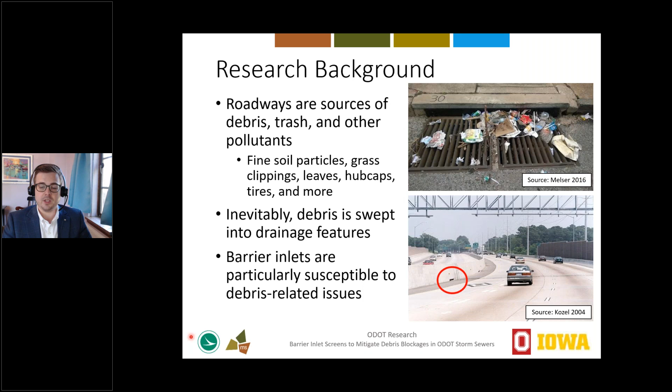A little bit of background about this project: as we all know from driving around on roadways ourselves, roadways can be a source of trash, debris, and other pollutants. Everything from fine soil particles, grass clippings, leaves, and hubcaps inevitably ends up on the roadways. And when it rains, this gets washed into the drainage features and the roadway inlets.

This research project focused primarily on barrier inlets due to their susceptibility to this debris issue. The barrier inlet you're probably very aware of, whether you've noticed it or not, are the concrete barriers along highways that divide traffic. In the ODOT world, these barrier inlets are comprised of a very short but long inlet window, as you see in these pictures: 4 inches tall by 10 feet wide.

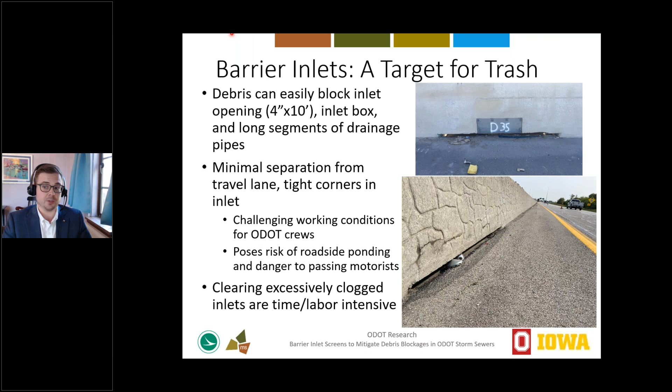Due to this particular geometry, large debris like plywood, buckets, anything that could fall off a car or be found on a roadway, can get swept into these inlets. Once it gets into that very small opening, it's very difficult to get out. So ODOT maintenance crews have to perform very invasive sewer cleaning and other maintenance practices to clean out the inlets after debris has gotten into the underground storm sewer system. This poses a risk to the roadside maintenance crews who are exposed to traffic for extended durations of time.

This picture shows a good example of the kind of issue we're dealing with along the roadways. As you can see, taken down in District 8 near Cincinnati, a small piece of plywood about 30 inches long, 12 inches tall - that's the type of debris geometry that can be swept into this inlet.

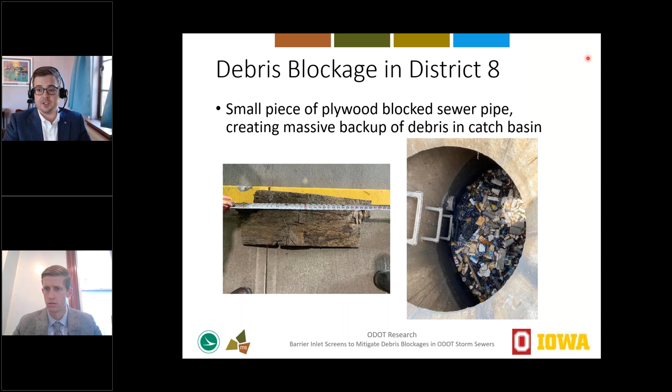Once that piece of plywood got into the underground storm sewer, it oriented itself just so that it was able to block the outflowing pipe underground, leading to a large debris backup that backed up the whole system. As you can see in that picture on the right, quite a bit of debris was unable to leave the sewer system, and this had to be vacuumed out, creating a big maintenance issue for ODOT maintenance crews. If left unattended, this can cause the inlets to clog and have reduced hydraulic efficiency.

So the goals and objectives of this project are to prevent large roadway debris from entering these systems. The large debris is what causes these underground sewer clogging issues and is the most difficult to remove once it enters the inlet. So we really focus on the large debris.

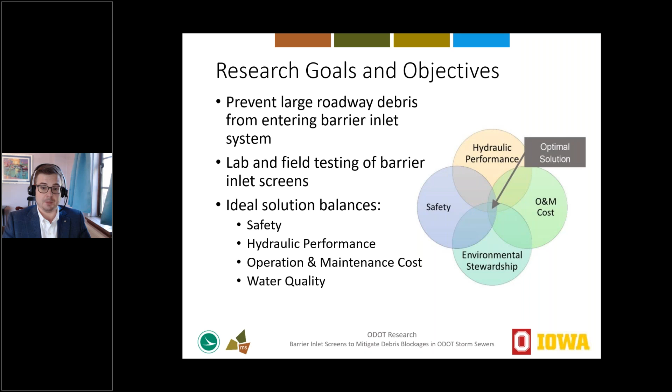We conducted this through a combination of laboratory and field testing of various inlet screen devices, and then identified our optimal solution as one that could balance safety, hydraulic performance, operation and maintenance costs, and obviously provide water quality benefits to the downstream receiving waters.

This research kicked off in September 2021 with an extensive literature review and a review of all available products currently on the market to address this particular problem. We then developed our testing methodology, installed field monitoring sites, constructed a physical hydraulic model setup at the University of Iowa, and did all of our testing for about 2 years. That brings us here today, giving this final presentation, and we'll be wrapping up our final report in June.

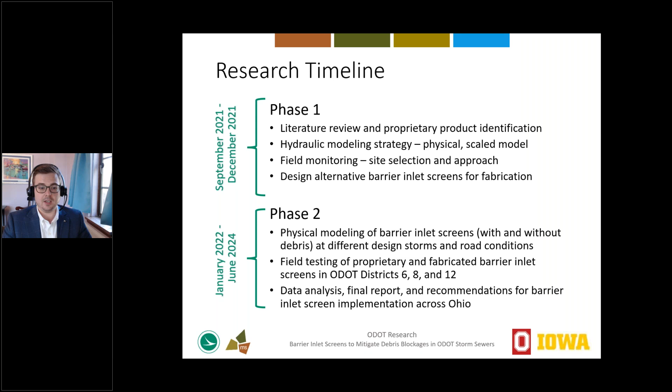We started with a very extensive research of all the available products on the market to identify what current solutions are out there that we could test. We identified a large number of proprietary manufactured products, and then using a selection matrix that evaluated different factors and product features, we were able to identify 4 products that contained a good cross-section of the market.

We wanted to test different attachment mechanisms, different opening geometries, and different special features. Some of these screens are automatically retractable, with springs that allow them to adjust, so the bars can open up when there's heavy hydraulic loading. We just wanted to test a variety of characteristics to see which performed best and would provide the best benefit to ODOT for their particular needs.

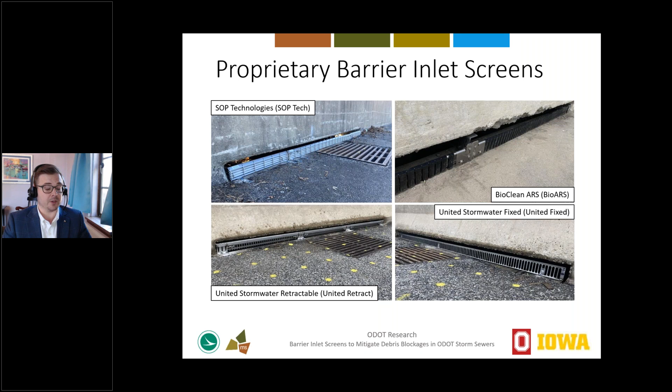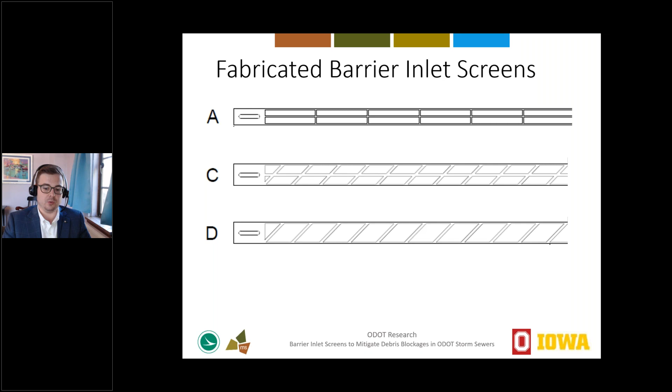In addition to the proprietary screens, we also fabricated some of our own unique designs. Because ODOT wants to focus on the large debris that's really causing them their issues, we created inlet screens with bigger openings than what's typically available in a commercial product. And because of the application along existing roadways, there's quite a bit of geometry deviation in these inlet windows across the roadways, so we wanted a product that could be easily bolted to the face of an inlet and be more forgiving in terms of geometry, better suited to a statewide mass-scale implementation.

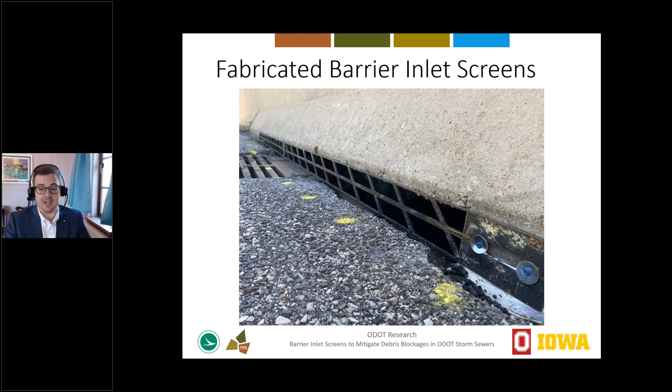So between the manufactured screens and our own fabricated screens, we identified a whole different variety of opening sizes and characteristics to test in terms of debris capture efficiency as well as hydraulic efficiency.

This is the standard ODOT Type D number 3 single slope barrier inlet, the most common one you'll see along ODOT roadways. This is the one we focused our design on, and it includes the inlet window, which is 10 feet wide and 4 inches tall. In front there, you see that catch basin, which is a Neenah slotted grate, 30 inches by 36 inch geometry. Worth noting that the grate is there in front of the inlet in some installations, but the inlet window can also stand on its own without that slotted catch basin grate. So we tested both of those potential scenarios in our testing.

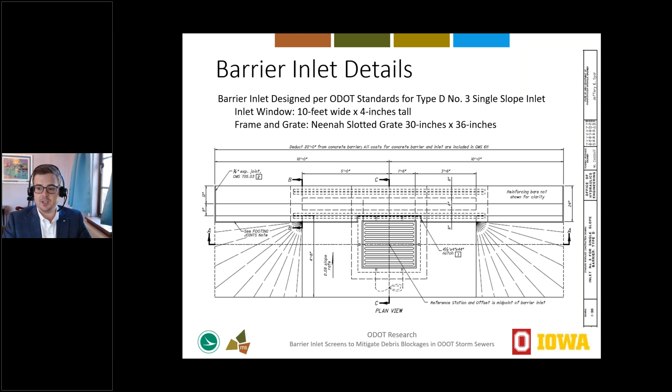So now I'll turn it over to Troy Lyons to talk about the laboratory experimental design.

Thanks, Justin. So I'm going to go through the laboratory experimental design and the testing that we did in the lab to evaluate the barrier inlet performance and screens.

We discussed doing a reduced model scale to be more cost efficient, but there were a couple of advantages to doing it at full scale. One is that we could purchase the existing screens directly from the proprietary groups, so we didn't have to try to replicate something at a reduced size. We also didn't then need to scale the debris; we could use actual debris for the debris tests.

So flow is conditioned as it enters the head box. There's a 10-foot wide by 16-foot long head box at the upstream end, and we pump water into that box.

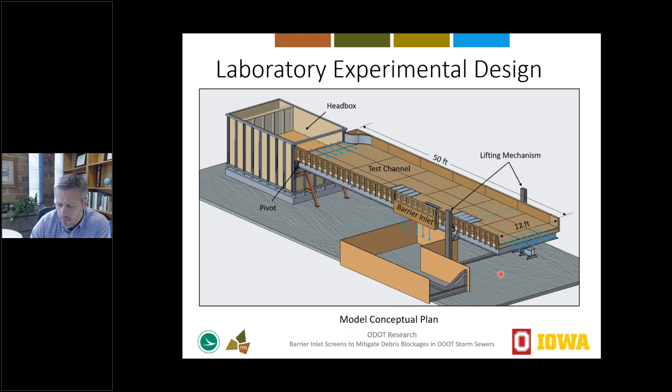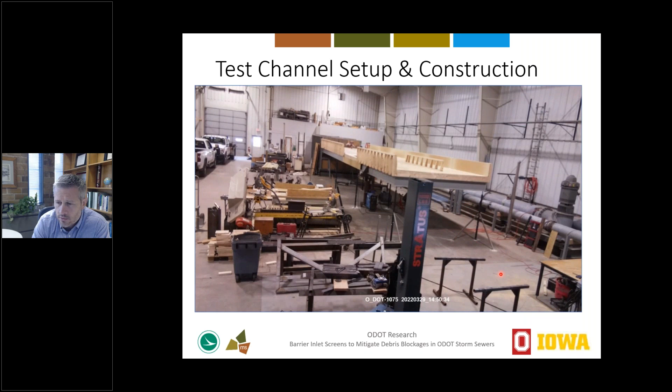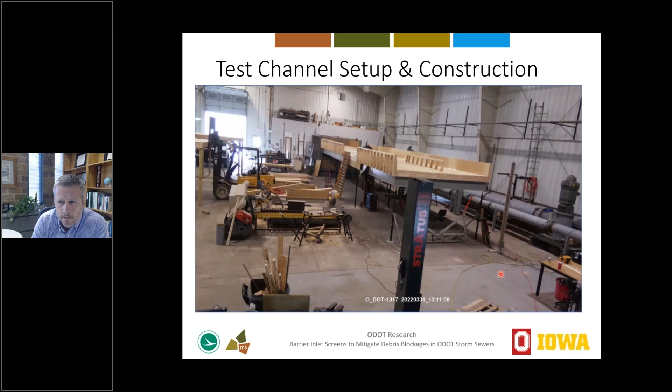So this slide shows a time lapse of the fabrication of the test channel and how it was set up. We started with three 50-foot long steel beams to support and create a rigid 50-foot long bed. That was then elevated, set into place. You can see that happened just there. We modified an electric car hoist that was placed near the downstream end so that we could raise and lower it. And then we had intermediate supports that we placed along the channel for our fixed positions that were required for the testing. You can see in the background the piping from the pumps.

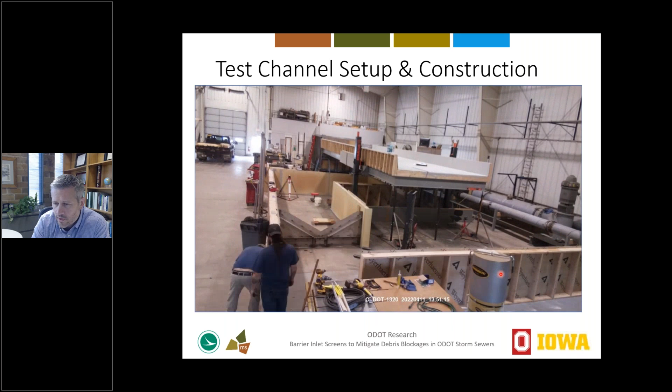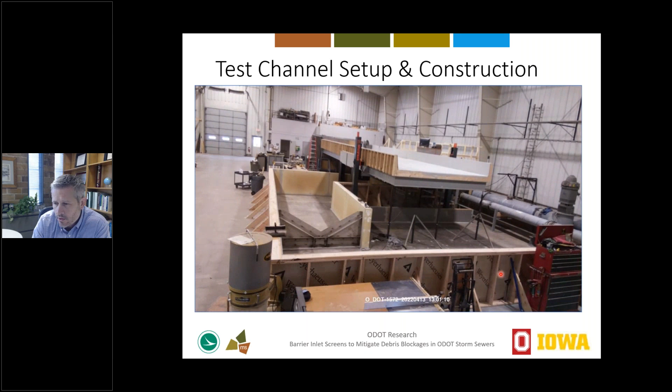So we have an underground reservoir that holds water, so we can pump water out of that into the head box through the channel. And then it comes out of the barrier inlet into that side channel that you can see is being fabricated there, and flows through a V-notch weir that's installed at the end of that channel so we can meter the flow coming out. And then the rest of the flow, including what's going off the end of the test deck, combines, gets filtered through some screens to filter out any debris. The water goes back into our sump, and that clear water then is recirculated back into the test channel.

So we did a friction slope calibration of the test bed. In our lab, we created the surface of the road deck out of plywood, but we knew that wouldn't provide us the correct friction slope. So we did an evaluation using Manning's N to check it and see what it started out to be. And then we incrementally roughened it to achieve a target Manning's N to match that of concrete or asphalt.

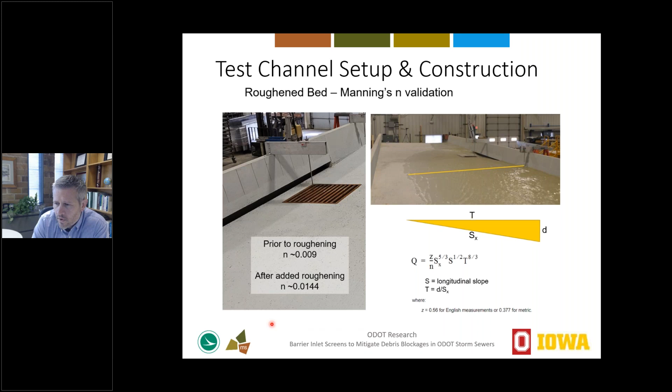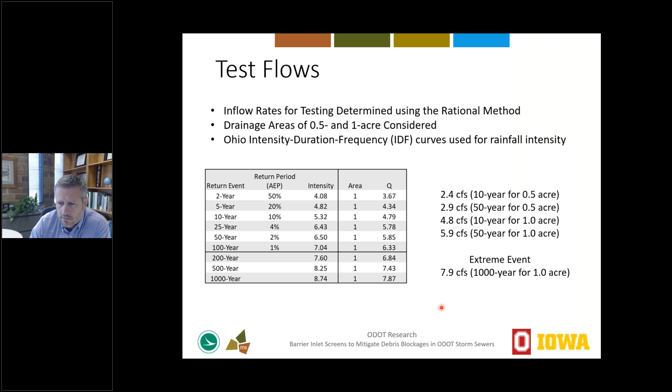These initial tests were done to characterize the hydraulic performance of the barrier inlet with and without the grate. So we metered the intercepted flow and then used that to calculate the hydraulic inlet efficiency over a range of different longitudinal and cross slope combinations. And what that did was provided us baseline hydraulic characteristics to later compare for when we added the screens onto the inlets.

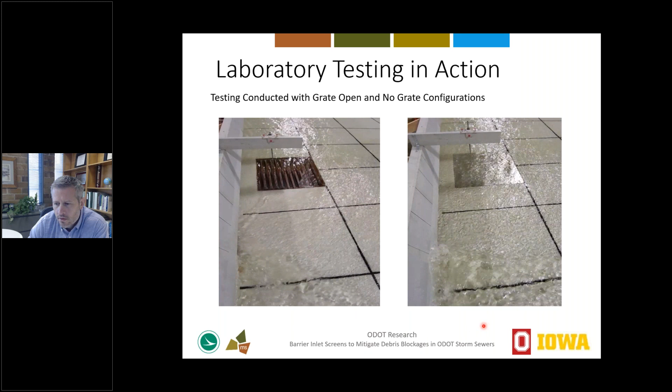To determine what debris we were going to use in the lab, we had to do some type of characterization. There were two sources that were quite helpful. One is that while we were designing and fabricating the test channel and doing the initial hydraulic analysis, Ohio University was already out in the field analyzing sites and collecting debris, so they were able to characterize what they were finding at the sites selected for field observations.

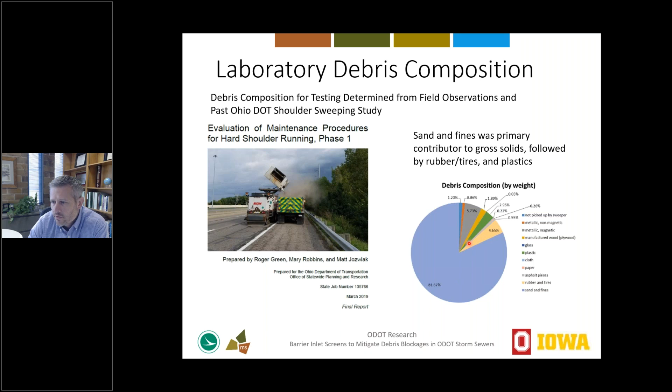That helped inform what we used in the lab, as well as a study from 2019 done for ODOT to characterize the debris collected by street sweepers. That's what this graph shows here on the right, a pie chart of the debris composition by weight. The large blue area, over 80% by weight, is sand and fines. After that, rubber, tires, plastics, and to a lesser extent, glass and metal.

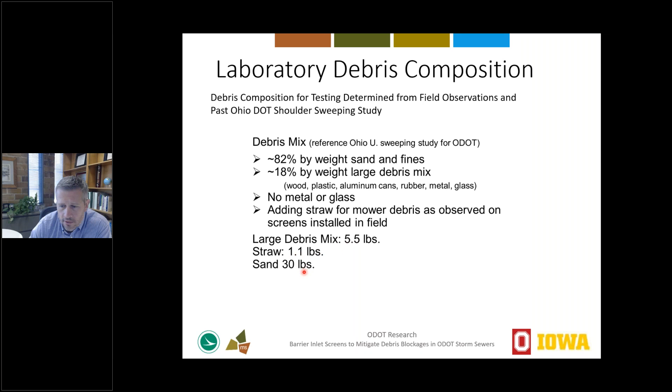So what we ended up using was a mixture informed by both what we were seeing in the field and the study we had access to. We used 82% by weight of sand and fines, and most of the rest was a large debris mixture of wood, plastic, and aluminum cans. We did not use metal or glass, but we did add straw to simulate mowing debris, as that was identified as a significant risk for clogging. We ended up with a large debris mix of about 5.5 pounds by weight, 1.1 pounds of straw, and about 30 pounds of sand used for each test.

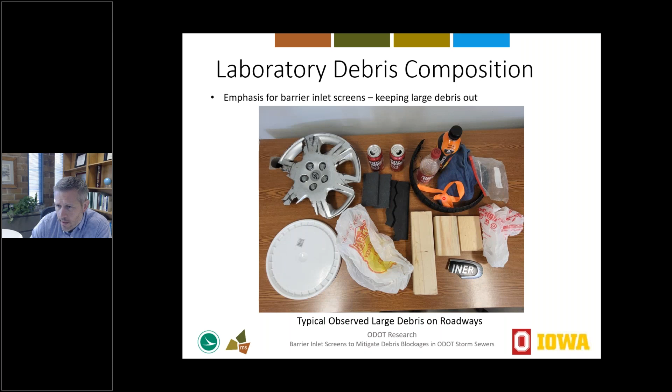Here's a photo showing an example of the large debris used. Some of this was debris collected from roadways, and other pieces were representative of typical things that could be found: a hubcap, aluminum cans, plastic bottles, pieces of rubber tire, plastic grocery bags, a bucket lid, chunks of construction lumber, a strap, and some pieces of cloth.

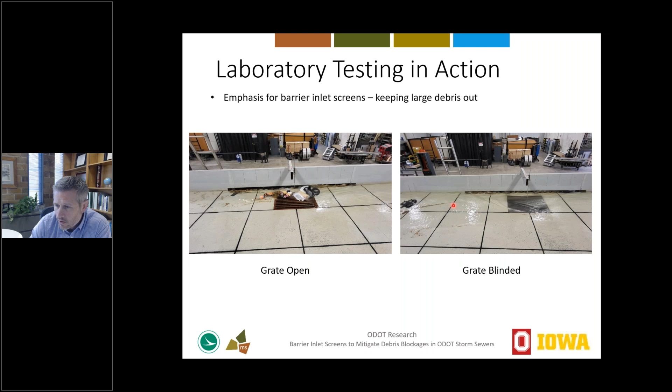We also see different characteristics in what happens to the debris. With the grate open, because most of the flow is leaving the test channel and not going beyond, it leaves a lot of the debris behind, much of it on the grate, where most of the flow is going. When the grate's blinded, we see a lot of the debris actually passing along with the flow instead of staying on the grate.

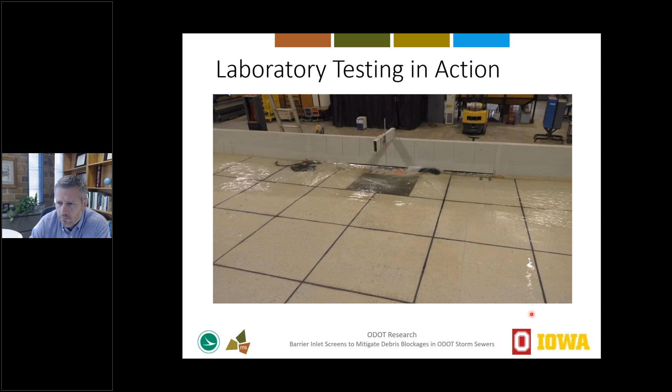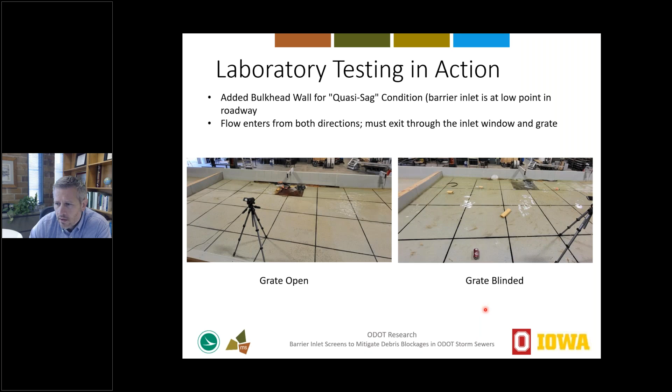So the grate was shown to be quite beneficial in a sag condition, both in keeping the water levels down and in being less prone to clogging.

In terms of how we quantified the lab results, this table is an example of one of many in the report. The rows are ordered by flow rate, from 2.4 CFS up to 7.9, and the columns are ordered by decreasing hydraulic efficiency. The baseline is the most hydraulically efficient, followed by the 3 fabricated screens—type A, D, and C—and then the 4 proprietary screens. This specific table shows values for a half percent longitudinal slope, 4% cross slope, in the sag condition with the grate open.

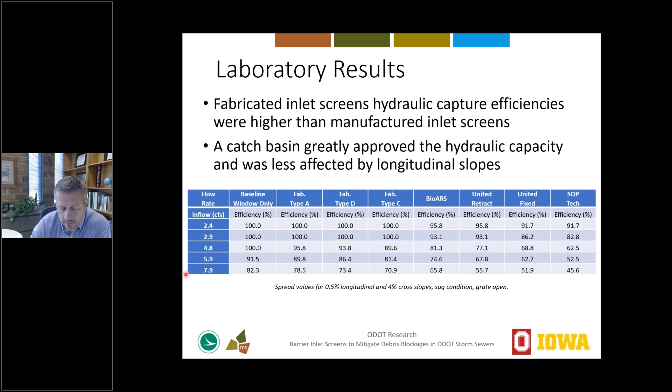The takeaways here were that, in general, the fabricated screens A, D, and C are more hydraulically efficient than the proprietary screens. Also, the catch basin, whether blinded or open, has a significant impact on the hydraulic capacity.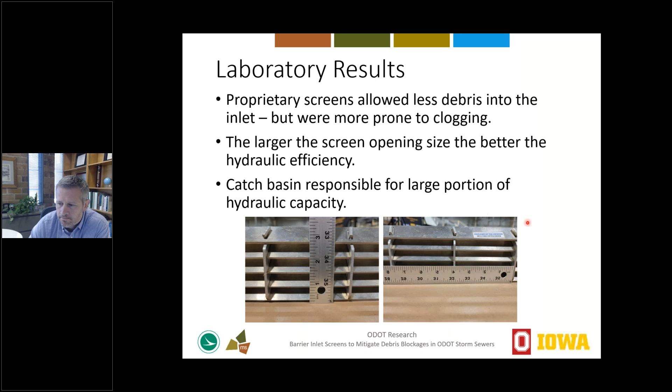Conversely, the fabricated screens with larger openings were more hydraulically efficient. They were less prone to clogging because they let more of the smaller to intermediate sized debris through, while keeping the large debris out, which was the goal. Finally, the grated catch basin does significantly impact the ability to handle debris and handle flows.

So Andrew, it's all yours.

Ohio State was tasked with performing field monitoring of these barrier inlet screens on actual roadways across Ohio. At the onset of the study, we consulted with the TAC to identify areas of hotspots for debris accumulation, and to no surprise, these were located in the greater Cincinnati, Columbus, and Cleveland areas.

So this is ODOT's districts 12, 8, and 6, as you can see there on the map. In each of these regions, we identified clusters of barrier inlets—8 barrier inlets in each region. The idea was to minimize variations between climatic factors, traffic, or littering practices, and to congregate each of these screens in an area that was relatively the same in terms of treatment.

In total, we were able to test each screen in triplicate, with one in each district. We also had a control in each district—in other words, an inlet that did not have a barrier inlet screen installed—so we could compare the barrier inlet screens against current practices in the state.

After identifying our sites, the research team faced an interesting challenge: we needed to monitor and be prepared to rapidly respond to drainage issues on the roadside in districts over 200 miles apart. To address this, we turned to real-time monitoring of these inlets using internet-connected depth sensors built in-house at Ohio State. We also paired those sensors with wildlife cameras to provide photo documentation of debris, and performed sampling at these inlets when we met certain conditions, which I'll show on the next slide.

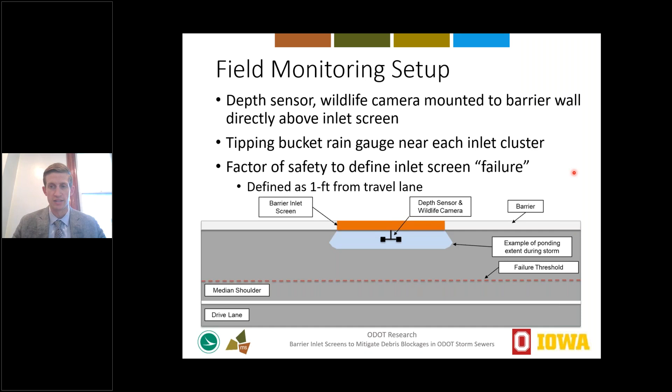We also set up alert protocols to notify research staff when debris needed to be collected, because we were posing safety risks potentially due to the extent of ponding in front of these screens.

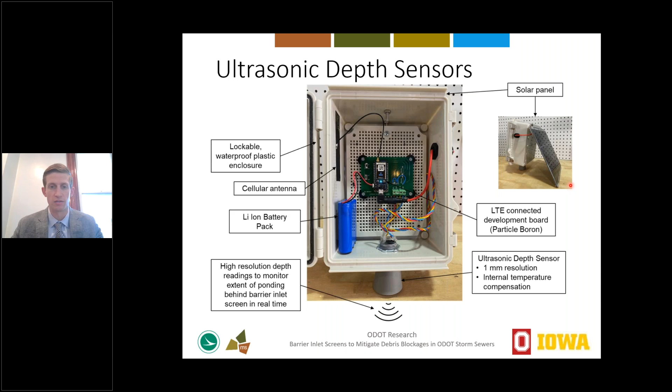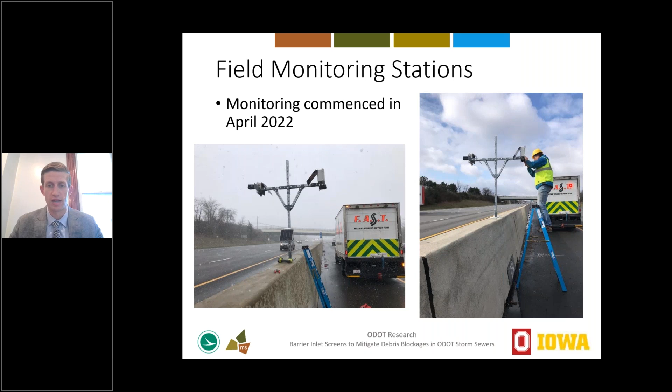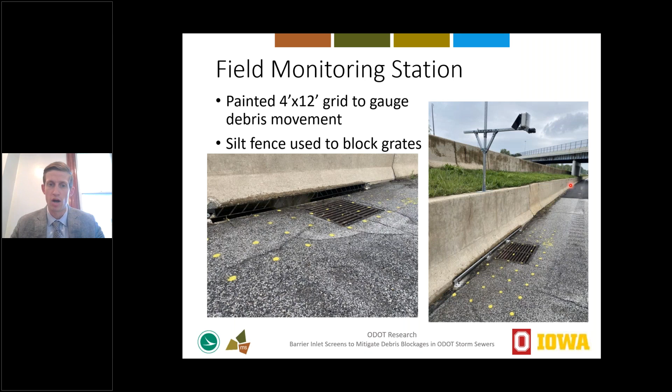Some of our inlets had grates, as shown in this picture, but in fact half of our inlets were barrier inlet window only, so they did not have that catch basin grate. So in order to make an apples to apples comparison across the 24 barrier inlets we were studying, we used sections of silt fence to temporarily block off those grates and encourage all water to flow in through the barrier inlet windows themselves.

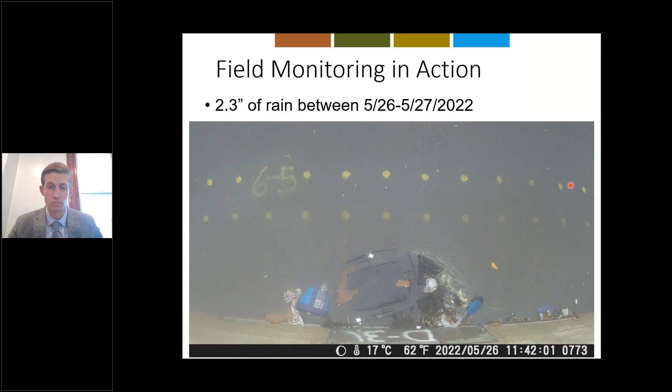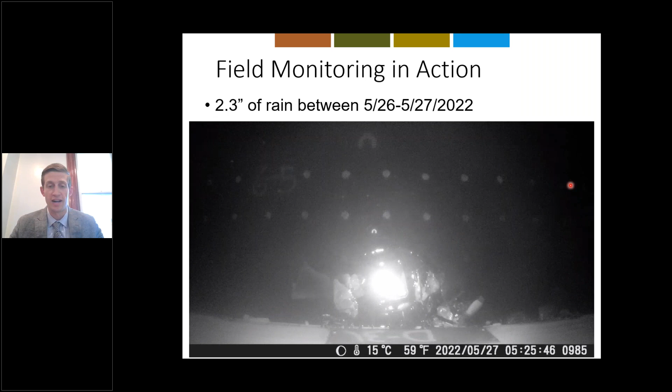Here's a time-lapse video of field monitoring in action. This is a large rain event, 2.3 inches over the course of 2 days, about 6 weeks after we installed the barrier inlet screens. A couple of things to point out: first, you can really see the amount of runoff and water directed to these barrier inlets. That's a result of the drainage areas feeding these being completely impervious and also extremely efficient in their ability to convey flows to these inlet points.

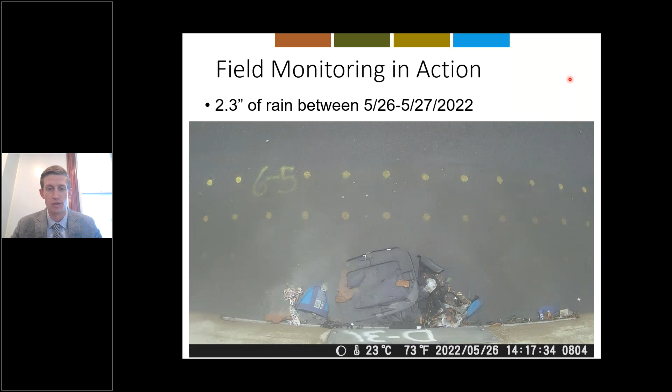The other piece I'll point out here is this plastic tote lid stuck in front of this barrier inlet window. That is almost exactly the type of debris we are trying to prevent from getting into the sewers, and it's very similar to the piece of plywood that Justin showed earlier that created that debris backup in District 8. If that were to get into the sewer and orient itself perpendicular to flow, it could result in a huge maintenance burden to unclog sewer pipes down the road.

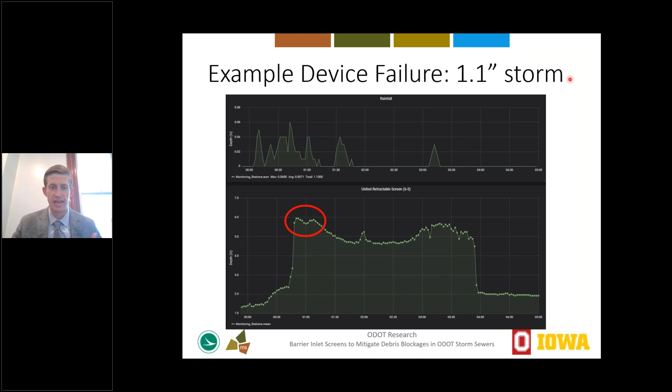Here's an example of rainfall data and a hydrograph from our first failure storm, which was a 1.1 inch storm. Most of this rainfall occurred within an hour shortly after midnight. In the bottom image, you can see how stage in front of our barrier inlet window picks up quite a bit until we exceed that ponding extent failure threshold.

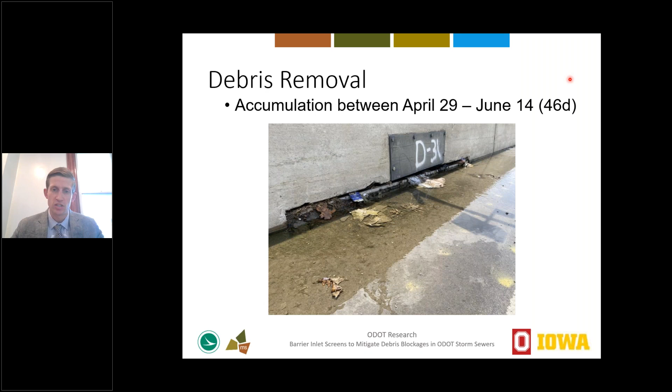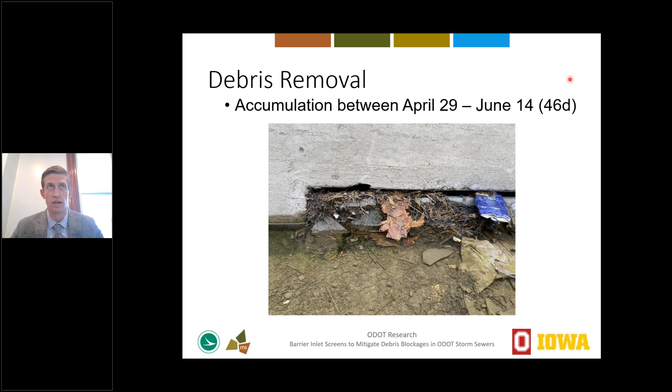The day after this, we went out into the field. This is one of the proprietary screens shown here in a sag condition, in that low point, receiving water from both sides. This was debris that had accumulated over 46 days. In these close-up images, you can see all sorts of material: organics, cardboard, aluminum cans, effectively blocking all of the inlet windows in this particular screen.

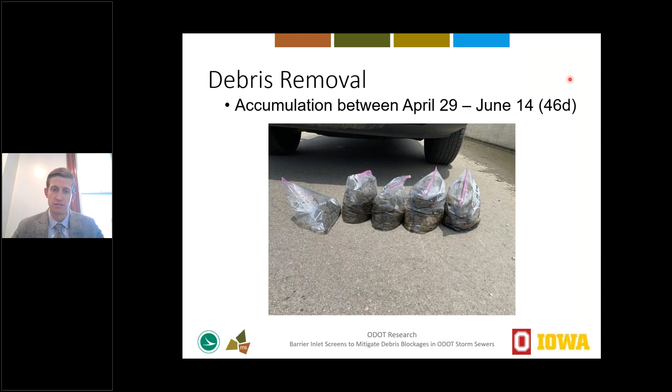The research team went out, collected this debris, reset conditions, and brought back what was effectively 4.5 gallon-sized Ziploc bags to our lab for analysis. In total, we had 13 of these debris failure threshold events over the course of the 2-year study, amounting to 271 pounds of material.

All 13 of these events occurred in Columbus, which is ODOT District 6. We think this happened for a couple of reasons. First, this was the site with the highest AADT, over 130,000 vehicles, so quite a bit of traffic load moving across these sites. Second, these sites were also on some of the flattest topographies, both longitudinally and from a cross slope perspective, very low slopes. We think these two reasons really contributed to why we had these debris collection events only occur in Columbus.

In support of the study that Troy showed previously, the majority of the debris we found was small sediment. We also saw rock and gravel as the second most common, followed by plastics and vegetation. In total, the average failure frequency was just over 91 days. But as mentioned, these 13 events only occurred in Columbus, or ODOT District 6. Considering the other cities we monitored, we did not have any debris collection events, so if implemented across the state, we think this number could be quite a bit longer.

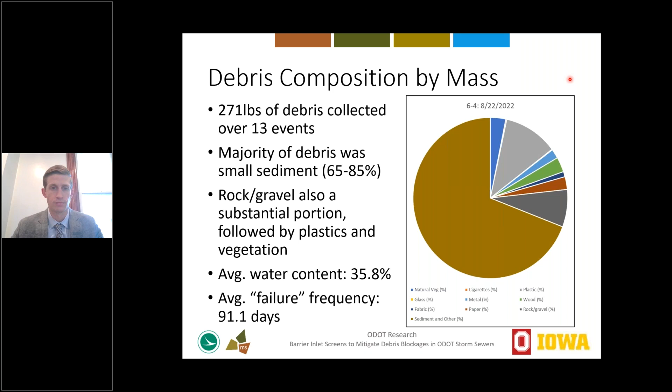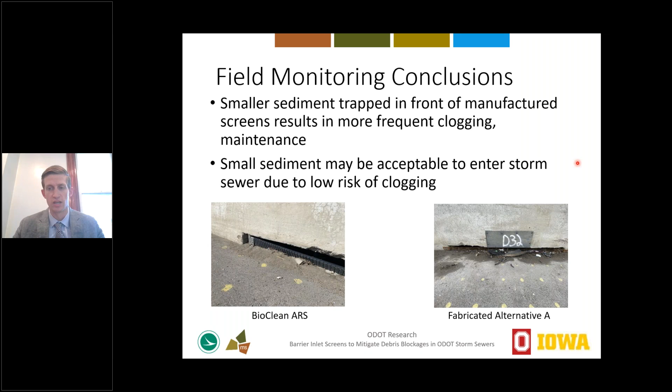Some conclusions from the field monitoring portion of the study: as Troy mentioned, we tended to see smaller sediment trapped in front of the manufactured screens, especially compared to our fabricated screens. You can see that in the image on the left, with a lot of small sediment trapped in front of this particular proprietary screen. On the right, in front of our fabricated screen, you don't see much of that small material, instead seeing larger pieces of cardboard and plastic. This smaller sediment is probably acceptable to enter the storm sewer because we think it poses a low risk of clogging those sewer pipes.

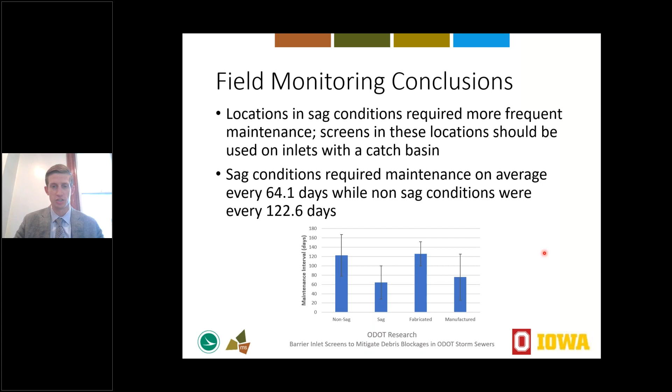In April of 2024, we did some field maintenance testing of the barrier inlet screens to ensure that if implemented across the state, these screens could be maintained effectively to reset hydraulic efficiencies when debris had accumulated to a certain point. In consultation with the TAC as well as maintenance crews across the state, we came up with three maintenance measures that we wanted to test.

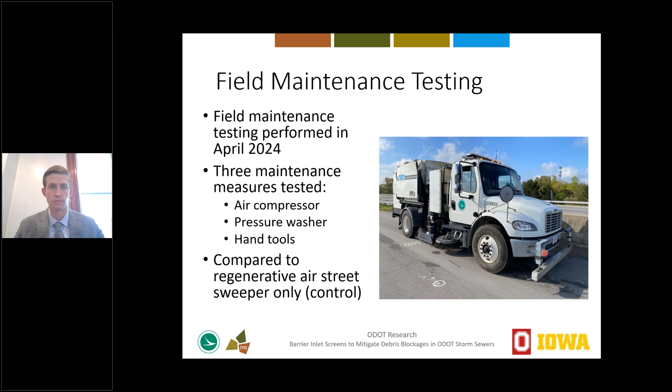This included an air compressor, a pressure washer, and the use of hand tools, all combined with the use of a regenerative air street sweeper, which represented current maintenance protocols across the state. We compared those methods against the regenerative air street sweeper only, which served as an experimental control for the maintenance testing. I want to show some images of these maintenance tests in action.

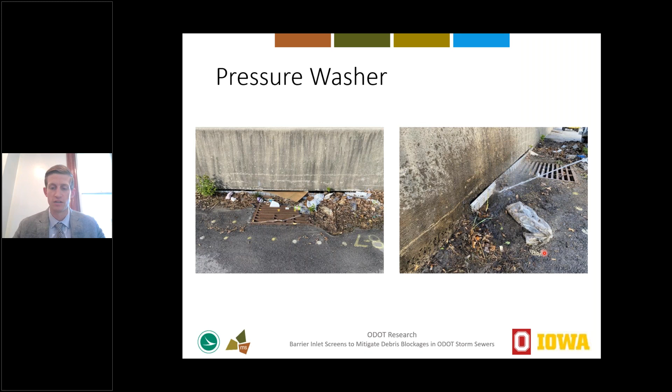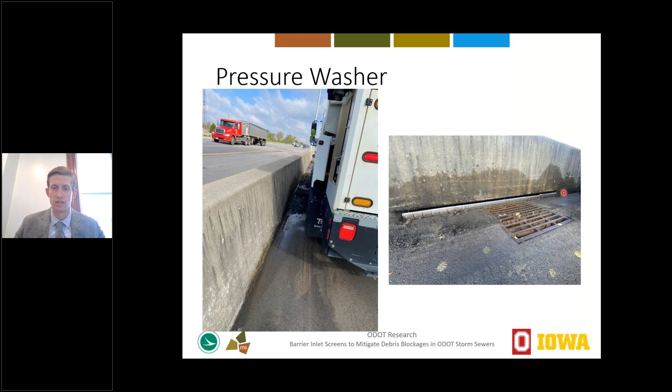Once the pressure washing had been completed, we took the regenerative air street sweeper and passed it over the inlet, and you can see on the image on the right that we've essentially got a completely clear screen, indicating that maintenance was highly effective in restoring the hydraulic capacity and function of this particular screen.

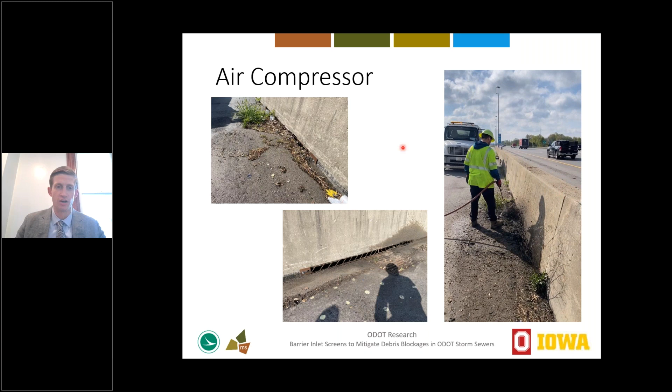Next, as I mentioned, we tested an air compressor. The image on the top left shows our initial conditions - again, quite a bit of material accumulated in front of this fabricated screen. On the video on the right, you can see how that air compressor is doing a great job of loosening up the material that had become trapped on and in front of the inlet screen.

And then finally, we again took the street sweeper, passed it over the screen, and you can see the stark difference between the condition of the screen prior to maintenance and after maintenance had been completed. Again, very, very effective in terms of loosening that material.

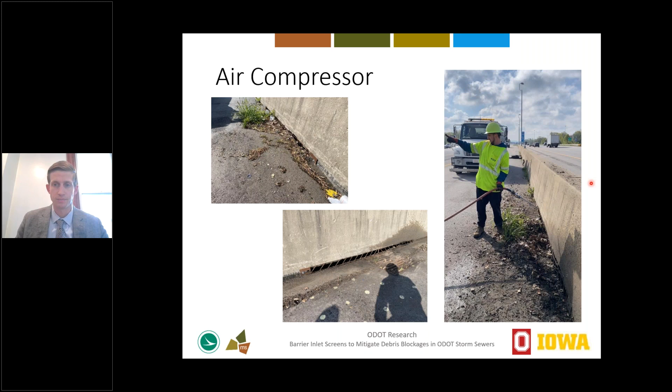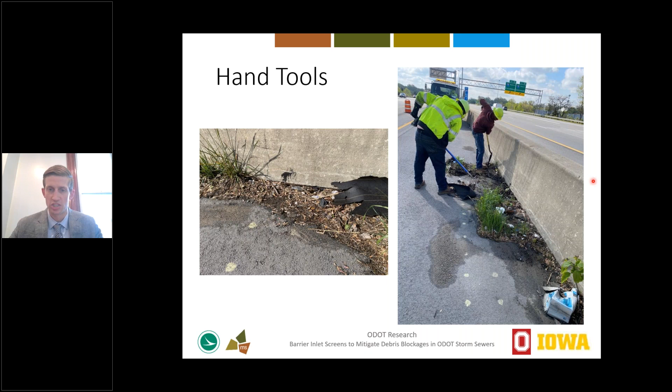The next method that we tested was hand tools. This represented one of our more simple methods in terms of the type and complexity of equipment needed, but it also had some drawbacks in that it required more staff, a more hands-on approach to loosen this material. But again, just like the other methods we tested, this method was also highly effective, and we found loosening that material prior to the street sweeper passing by the barrier inlet screen was a really potent combination to remove the debris from the roadside.

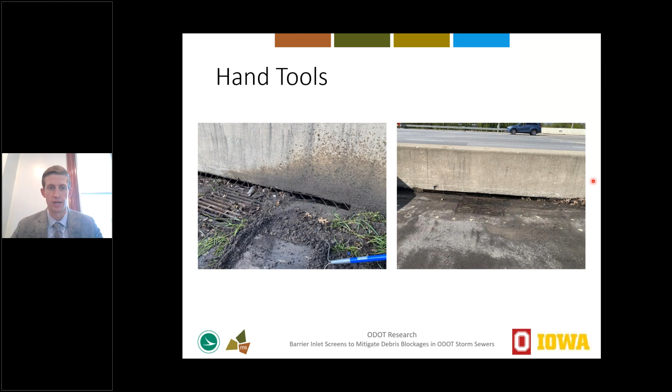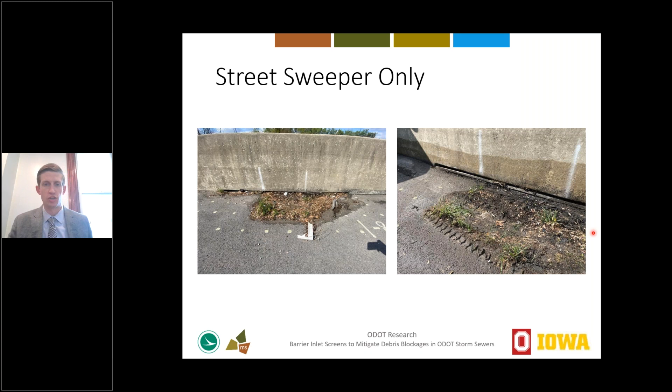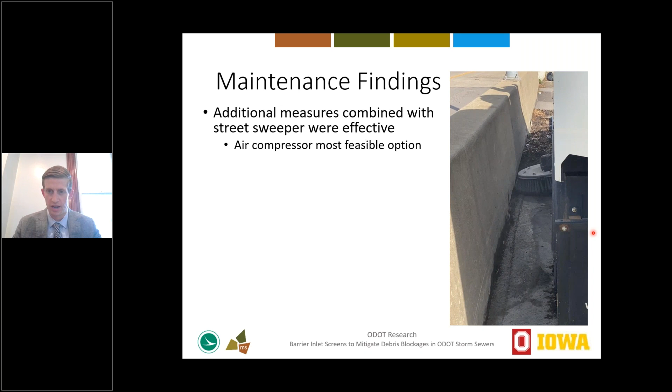So what we concluded is that these additional maintenance measures combined with the street sweeper were highly effective. You can see here on the video on the right, the street sweeper going by after we had used the pressure washer in this case.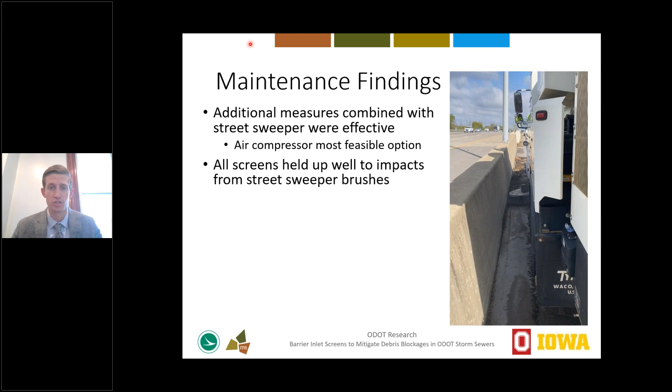After consulting with the research team and members of the TAC, we found that the air compressor is likely the most feasible option for barrier inlet screen maintenance at scale. We were really happy that all of the screens held up well to impacts from the street sweeper, as you can see here with one of our fabricated screens.

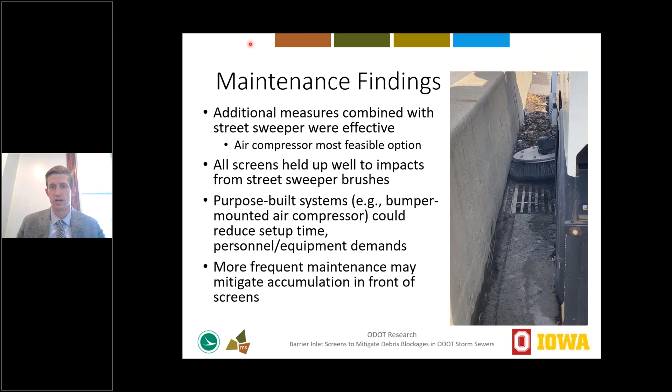We think there might be opportunities for purpose-built systems, something like an air compressor mounted to the bumper of a street sweeper, for example, which could reduce setup time and then personnel and equipment demands. And then lastly, more frequent maintenance in front of these barrier inlet screens may be helpful to mitigate the sort of extreme amounts of debris that you can see here in front of the street sweeper.

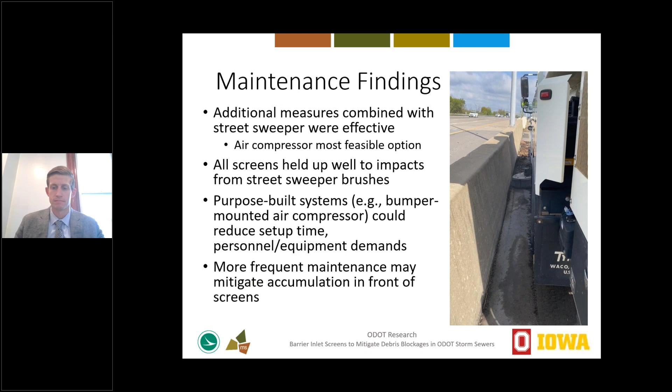Based on the findings from the laboratory, the field investigation, and the maintenance demonstrations, we conducted a cost-benefit analysis. We wanted to look at the cost of these screens, including manufacturing, installation, and maintenance, compared to the current alternative, which is letting debris get swept into the inlet and then vacuumed out through heavy sewer and inlet cleaning with a vacuum truck. This requires breaking down a whole lane and potentially spending up to a day cleaning out a short series of inlets. It's very labor intensive and puts ODOT personnel out on the side of the road for an extended amount of time.

Compared to that practice of vacuum heavy sewer cleaning, the screens are extremely cost beneficial, especially the fabricated screens. They are cheaper to produce, faster to install, and have a universal fit. One of the bigger challenges with the manufactured proprietary screens was that they required detailed measurements of all the inlets before you could fabricate and install them. Having a bolt-on, ready-to-go option that ODOT can stockpile and have on hand is a good benefit.

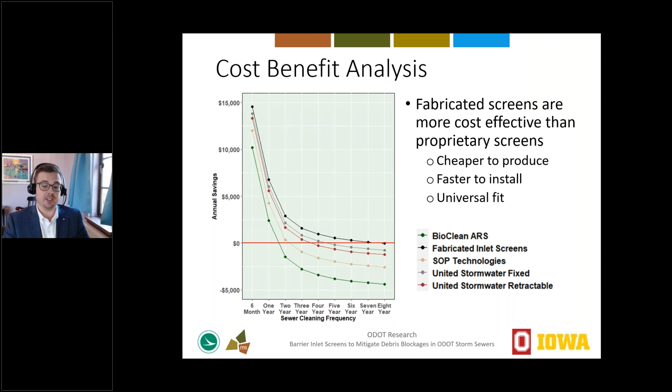This tells us it's a good thing that CDSS has the extra factor of safety. So if we were to retrofit existing inlet sites with these barrier screens, there really is no adverse hydraulic impact. We're not going to worsen the condition or cause roadway flooding, because the CDSS software already has that factor of safety built in, meaning there would still be plenty of capacity and the spread would be allowable.

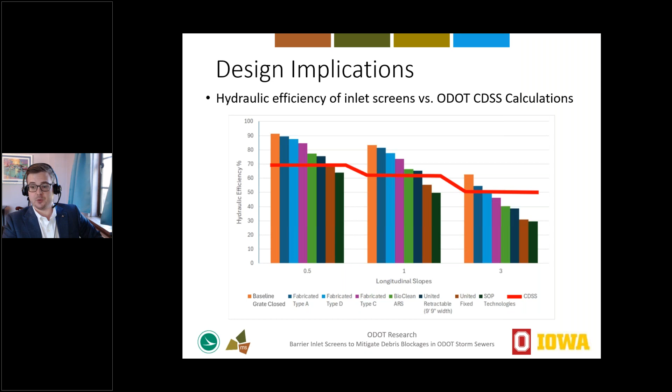Overall, the research team recommended that these barrier inlet screens could be installed starting with areas of known debris issues. ODOT can then maintain a database and a maintenance log to monitor these screens for a longer duration, and the rollout could be expanded once all the maintenance SOPs and maintenance staff get more familiar with the screens and how to maintain them. These screens could be very effective when rolled out on a statewide implementation.

We found that the additional maintenance requirements were not excessively burdensome -- maybe a few extra seconds to clean them during routine street sweeping -- but it seemed very plausible and effective. We also recommended that visual markings be placed on the barrier walls at locations where the barrier inlet screens are installed. This will make it easier for maintenance crews to identify them in the field and know they're there.

This is also very helpful for snow plows and other maintenance vehicles and contractors, so they know where the screens are and can be aware of them during their day-to-day operations.

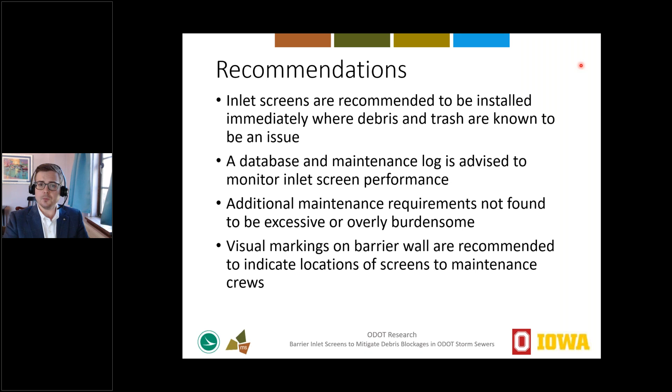So we do advise to only use the screens when a catch basin grate is present in a sag condition. We notice that sag condition is the most prone to clogging and the most prone to excessive spread and ponding. So really that recommendation applies to whether you're using a barrier inlet screen or not. Just in general, the sag conditions benefit greatly from having that catch basin in place.

But we think that in a sag, if you want to use one of these barrier inlet screens, the catch basin is highly advisable. And then some expected benefits from this implementation: we anticipate reduced cleaning and maintenance time and cost to ODOT, safer working conditions for ODOT maintenance personnel, sustained inlet hydraulic capacity, and cleaner receiving waterways.

So based on all these findings, the maintenance, the laboratory tests, field observations, we refined our fabricated screen alternatives and came up with what we think is a very optimal design. We looked at the opening size area, so how big is each opening, and we compared that to hydraulic efficiency as well as debris capture ratio. And then looking at those two numbers, we were able to hone in on this optimal opening size.

And then we also made a couple other tweaks, such as additional mounting points, and we found that making the screens a little taller allows for more variability in inlet geometry, so they can be installed on the vast majority of all inlets across the state. And then the extra mounting points provide a little extra stability and a little more rigidity to the installation as well. So that was our final recommendation to ODOT.

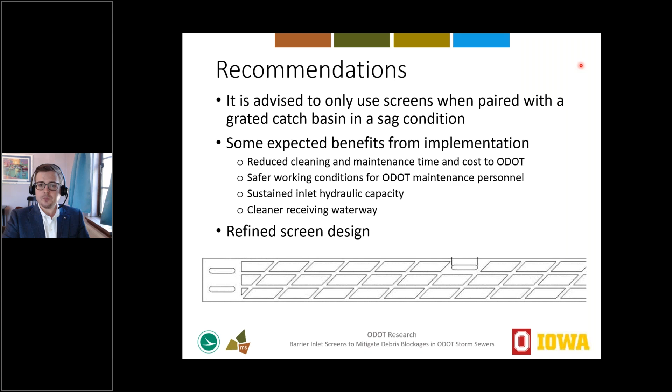We now have about 10 minutes for any questions from the audience, and we'll also be publishing our final report in June, just in a couple days here. And all the details and data will be available at that time as well for everyone's review. Happy to take any questions at this time.